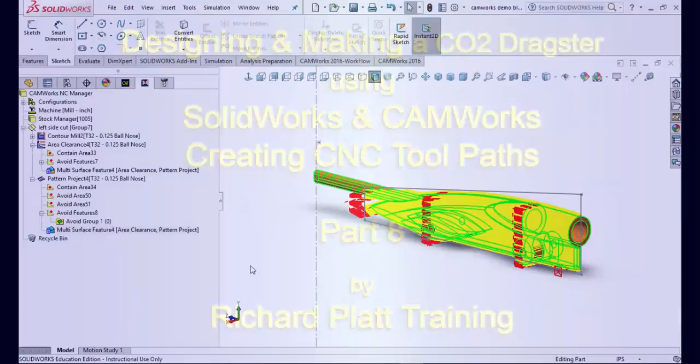Now that we've got our left side tool paths done and our axle holes operating successfully, milling through the block, and everything's in the priority we want, it's time to go around and complete the tool paths and do the right hand side. So we've got to make sure that's going.

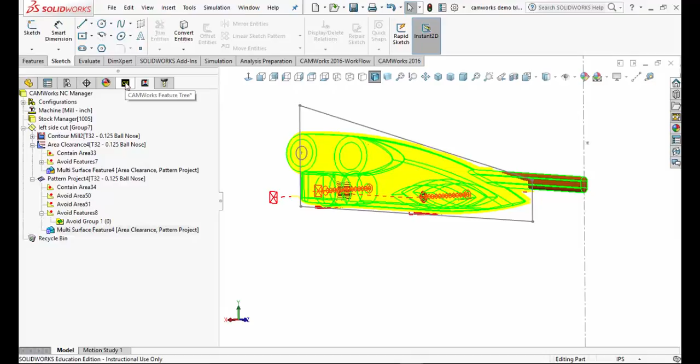What I'm going to do now is come back over here to my CAMWorks feature tree and set myself to that. But before I do that, I'm going to go down to the pick point sketch I created earlier. I need to create a pick point for this side as well, so I'm going to go ahead and edit that sketch.

I'm going to set myself to the back of the block, come up to the top of my tree and set normal to the front plane. Now it'll rotate around. I can come up here and select it and flip it back around on the back side, which I will do, and I can start placing that sketch.

So I'm in the sketch command. I go back here and place a point, just coming right across here. From that, place a point. I could have done a mirror entities -- in fact, let's do that instead. Well, we're already there, let's go ahead and keep what we got.

So we'll go here to there, put that in, and set that distance to 0.125. Actually, I'm going to increase this -- I'm going to go to 3/16, .1875. That way it's going to give me a somewhat better cut.

That's a little bit further on that side, but there's a reason for doing that, and that is to definitely ensure there are no mate line problems. So I'll check that off, and now I've got that set correctly.

So let's go over here to the CAMWorks tab. Oh, before we do anything, rebuild and save our document.

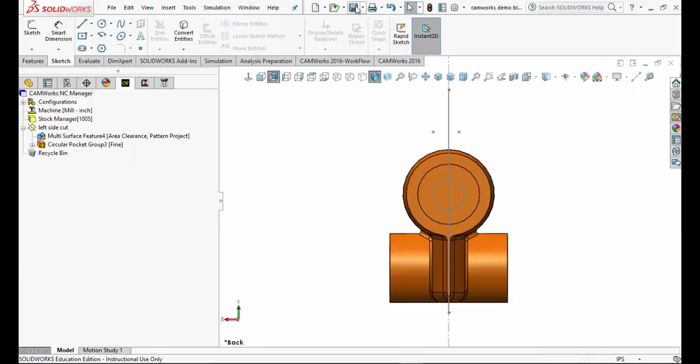So now we're back over here in CAMWorks. Let's go back up to our stock manager, do a right mouse click on the stock manager, and create a new mill part setup. This again is critical.

We come around here and look at the orientation of our drilling bit. Our drilling bit's pointing at the very end of the car, so what we're going to do now is go ahead and change that.

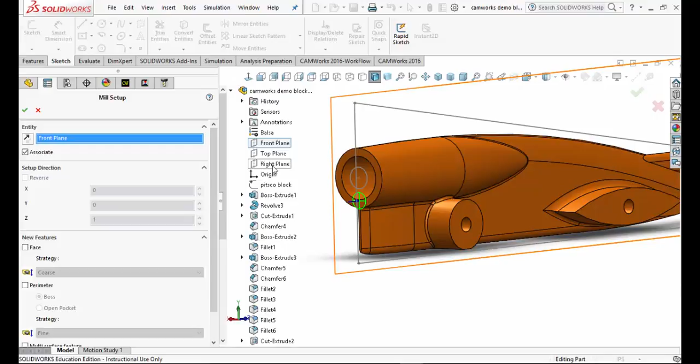We'll come over here and open up our feature manager, and set ourselves normal to the right plane. Now notice, we were lucky on that -- it just put it right directly on there. It's not reversed and we don't have to flip that around, so that's good. We'll go ahead and check that off.

Now we have a new mill part setup, called mill part setup 7. We're going to rename that -- right mouse click, rename, and we'll call this one right side cut. Okay, hit enter. Now hopefully our licenses are still intact.

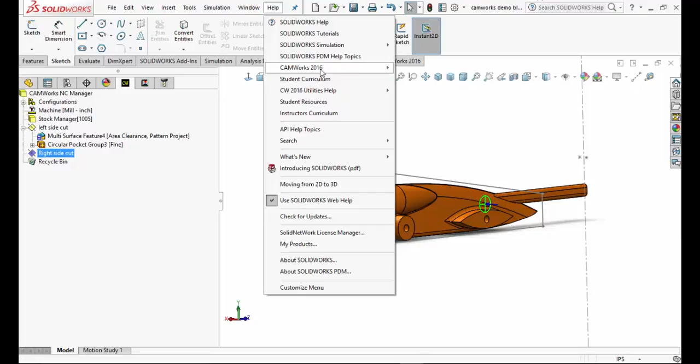We'll come back here and create a new 3-axis milling operation. Let's check this out one more time -- I'm a little hesitant about that. Let's double check our licensing and make sure we're good, and see if the licenses are in place.

Again, this takes a minute, so let's be patient, and as soon as it comes up we'll know what we need to do. That's what I thought -- so we'll select them all and say update licenses. Whoops, we didn't get them actually, we only got the mill turn. So I'm going to come back over here.

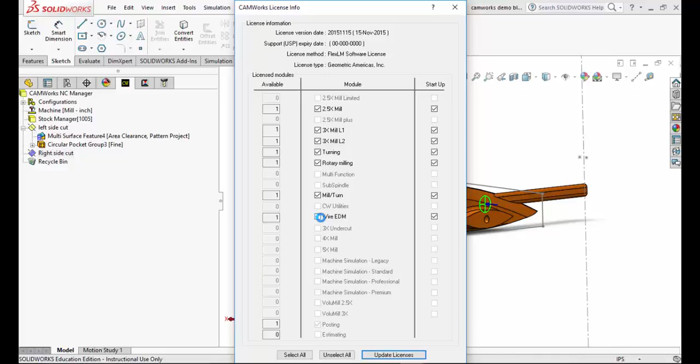Hopefully it'll come back and tell us what it's going to do. Yeah, I thought it didn't look right when I did that right mouse click on the right side cut, but we'll fix that and take care of getting that mill part setup. Alright, all are selected, that looks good. Go ahead and exit out of that.

Then we click on this again, right mouse click. Let's do a rebuild here real quick and save our document. And we're still in the operations tree, right side cut. We'll do a right mouse click, and here we go -- this is what I was looking for.

We want to go to new multi-surface feature, so we'll click on that. We're going to come down here like we did on the first one, and say select all, and select all of those for this right now. Check that off -- okay, so we've got that done.

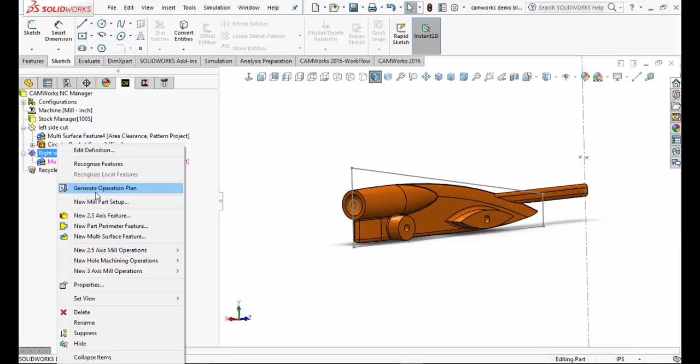Then we're going to come over here and do a generate operations plan. Remember, that takes everything from the CW tab over to the operations tree. So we'll go ahead and hit that, and it's processed it, and sure enough it brought us up over here.

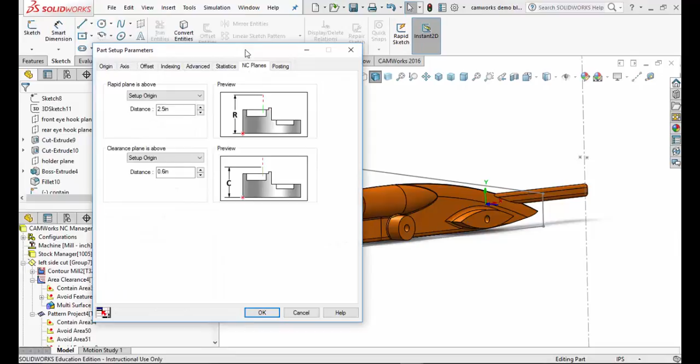Now what we want to do is double click on this and right click, and go ahead and edit that definition of that mill part setup just like before. Now notice where the axis arrives when this comes up.

Let's go over here to the origin. Notice it's sitting way out here in space -- it's actually in the right orientation, but at the wrong location. So we've got to get it back here to the offset sketch. See this something I'm clicking on right here? Here's what we're going to do.

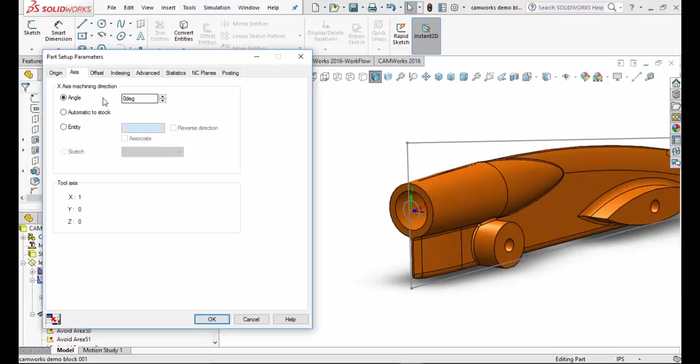Go back to sketch -- it automatically knows the offset is where it needs to be. It's going to go that direction. Y is in the correct orientation, and of course Z, the blue here, is in the correct orientation. So we don't have to change the axis, as we did on the other one, the left-hand side, where we had to go to 180.

Let's go back here to our NC planes. On the NC planes, I'm going to say in 0.25 of an inch. We'll tab down here to 0.125 of an inch, and we'll go ahead and accept that. Now, that's pretty good right there, and we're going to come back to this in a moment -- I got to get a break here, and we'll come right back.